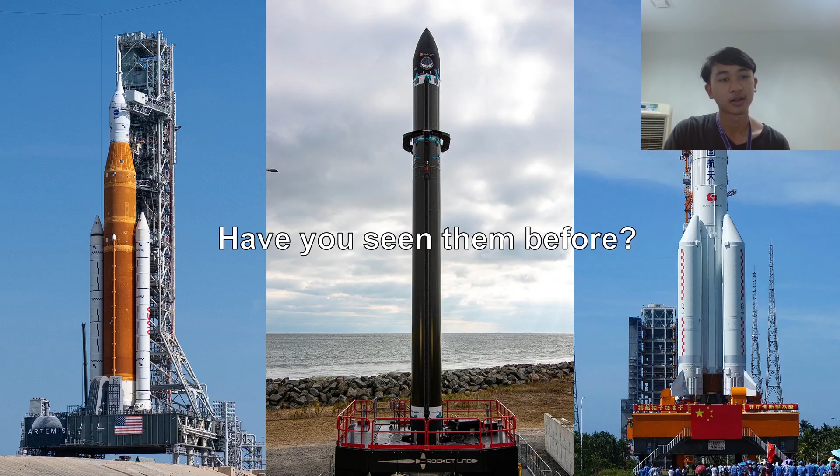Have you seen them before? Of course, these are rockets, and rocket or space technology and knowledge is a very valuable resource, though it is still very underdeveloped in Thailand. These are all examples of space products or space developments.

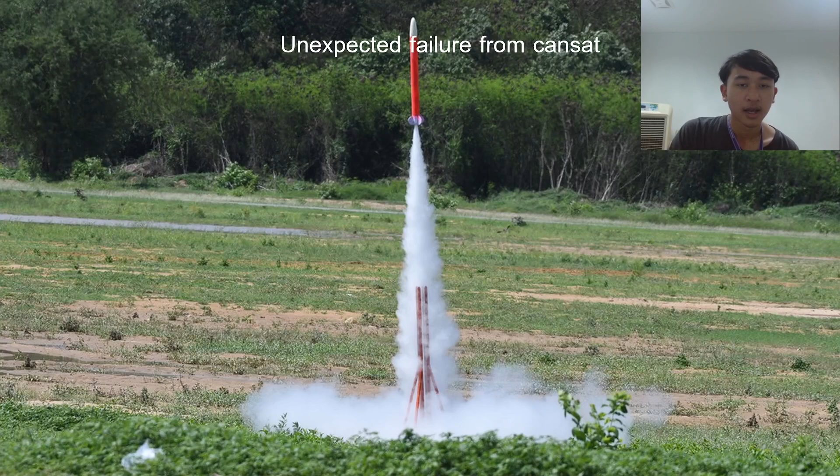We want to learn it and develop something, so we joined the CanSat 2022 competition in Thailand, and we found an unexpected failure from CanSat. That is, a rocket flew into the sea, making it unrecoverable. So we tried to find a new solution, which is dual deployment. Dual deployment doesn't really work because we can't control it. So we have to find another new solution, and we found this.

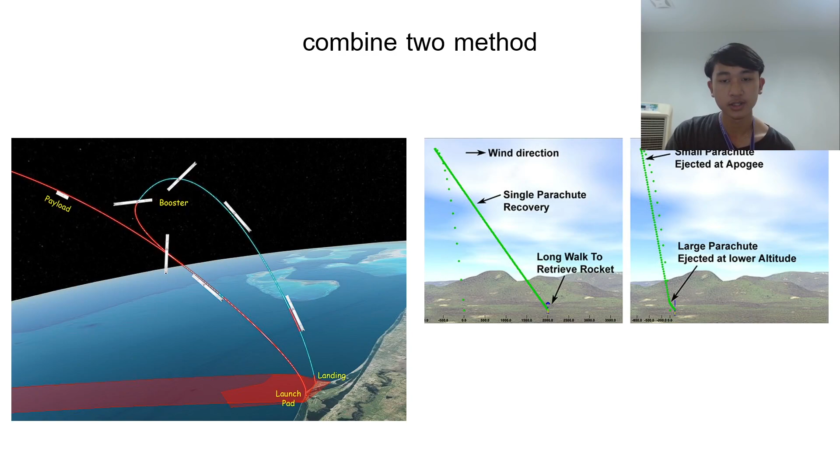SpaceX. SpaceX used a liquid-fueled rocket engine to do a boost back burn and then land their craft back to the landing complex. But we can't do that because we use a model rocket which is smaller and can only house a solid fuel rocket. So we try to replicate the method using a new invention: we combine two of their methods into our new method using a glide wing and then use a parachute right before touchdown to slow down our craft right at the base.

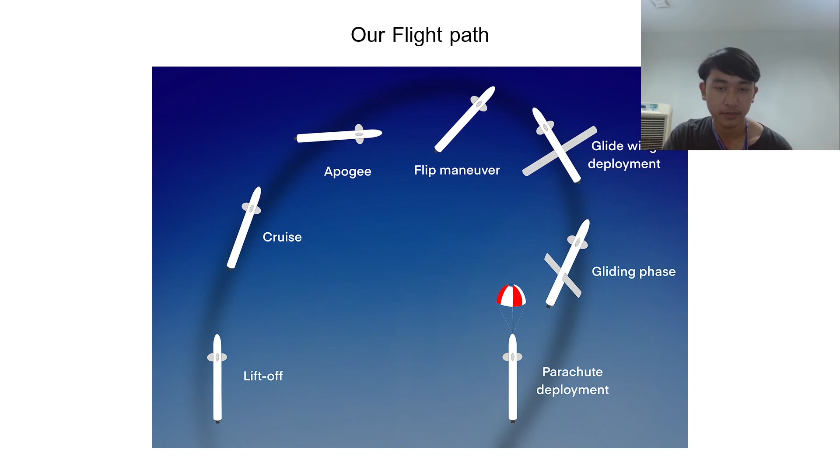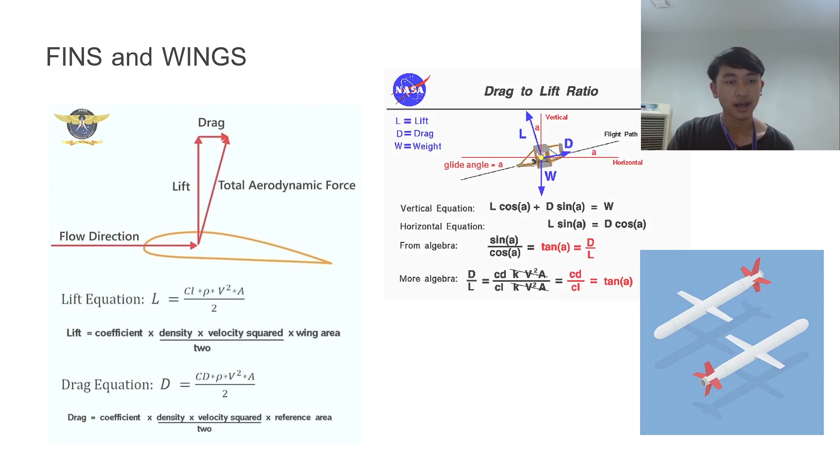Next, we will talk about our rocket and our building process. Our rocket is composed of three main parts, which are the flight computer, guided fins and rear wings, which will make most of the lift, and a parachute bay. Our wings and fins are designed according to aerodynamics, and then we design our flight path accordingly.

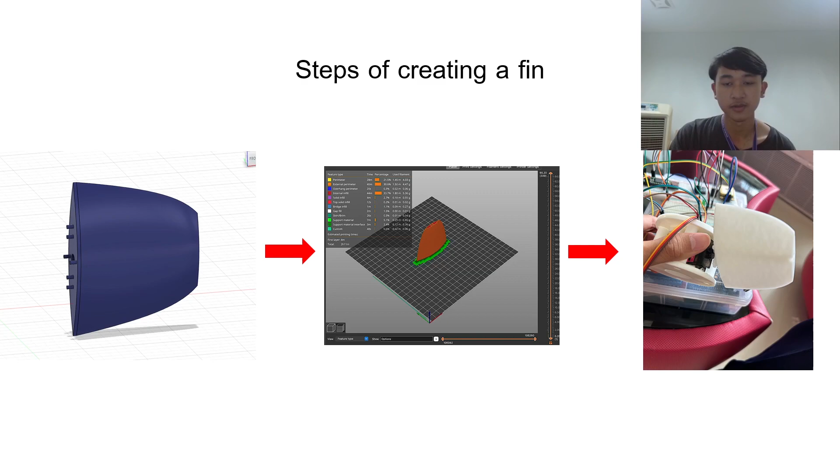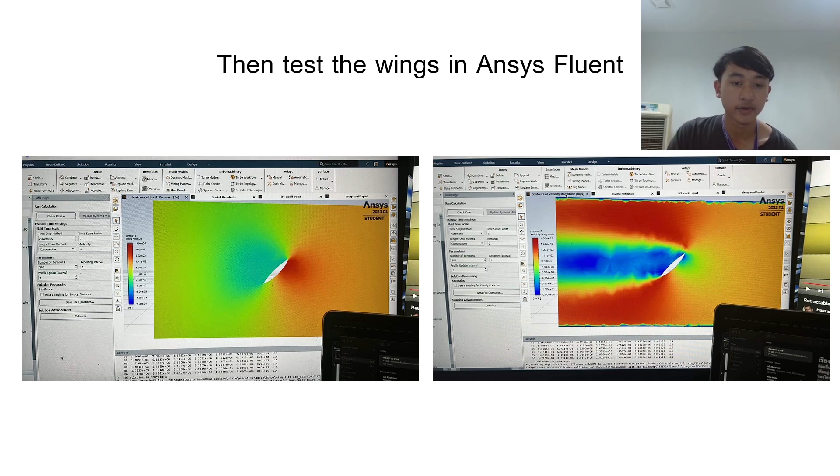And then we created it in Fusion 360, making it into a 3D model, and then sliced it in Prusa slicer and printed it using 3D manufacturing. On our left is our design drawing of the mechanism, and on our right is the 3D model prototype of our rocket. And we tested the wing in ANSYS Fluent to verify the characteristics of our fins and wings. This is our simulation data and our profile for the wings.

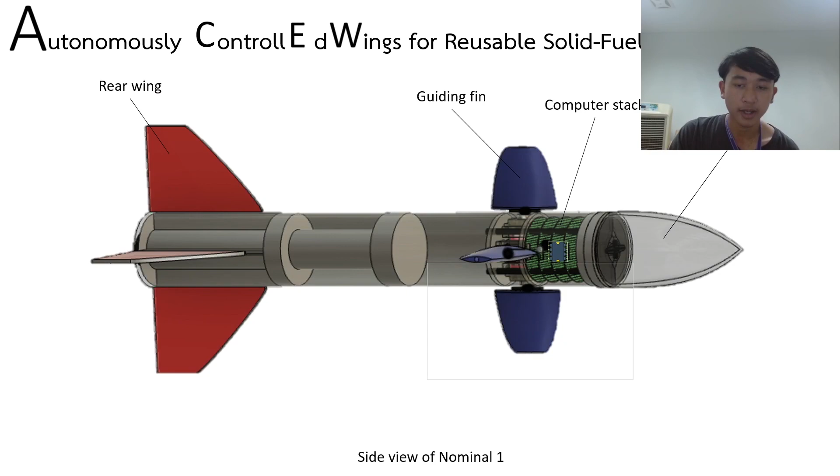Next, we'll hand the mic to Chupung Vibun to talk about the control system. Before we can control the rocket using the flight computer, we first have to know where our rocket is. But how do we know where we are? In order to obtain position, we use a GPS module tracked by satellite to calculate displacement from the launch pad, then calculate the flight path and feed data to the main control loop called the PID loop.

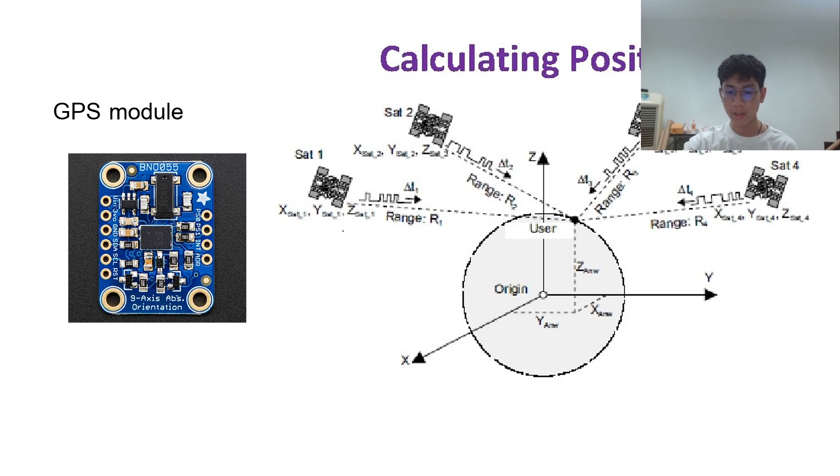But why are we using PID control? Because even though we know how the rocket should orient in order to glide along the appropriate flight path, we don't actually know how to command the steering fins accurately, and PID deals with that job very well. What PID does is set up an orientation set point, command the steering fins, and then measure the error from the set point and feed back to the control loop to reduce error. Due to that process, our rocket can orient approximately to the desired orientation from calculation.

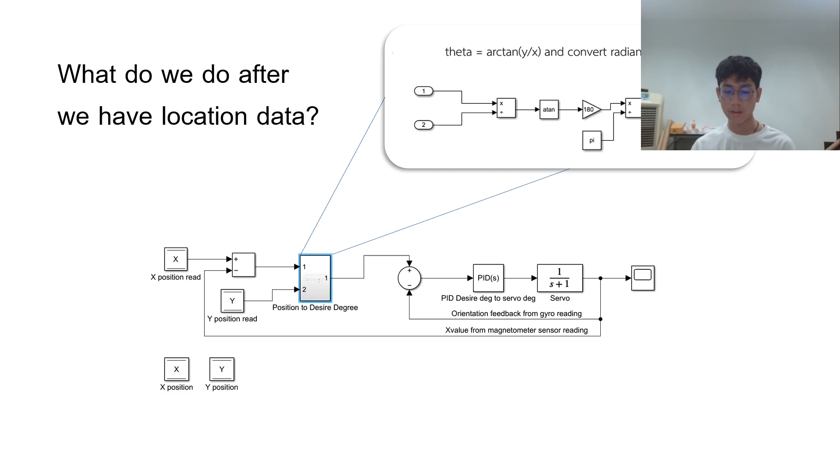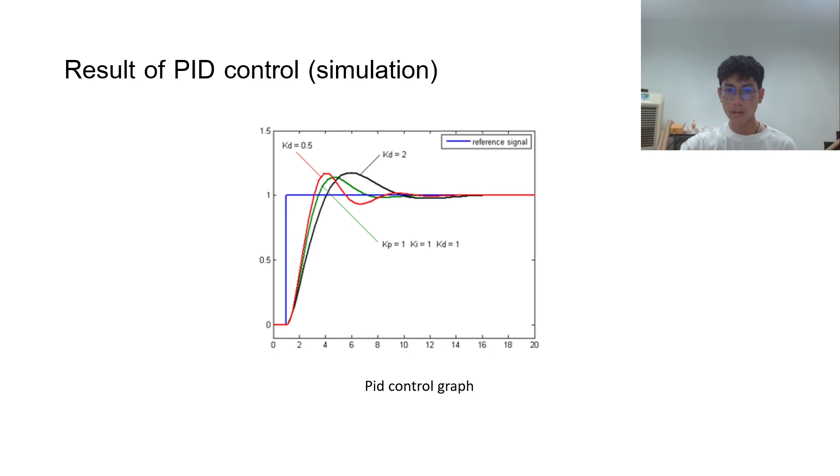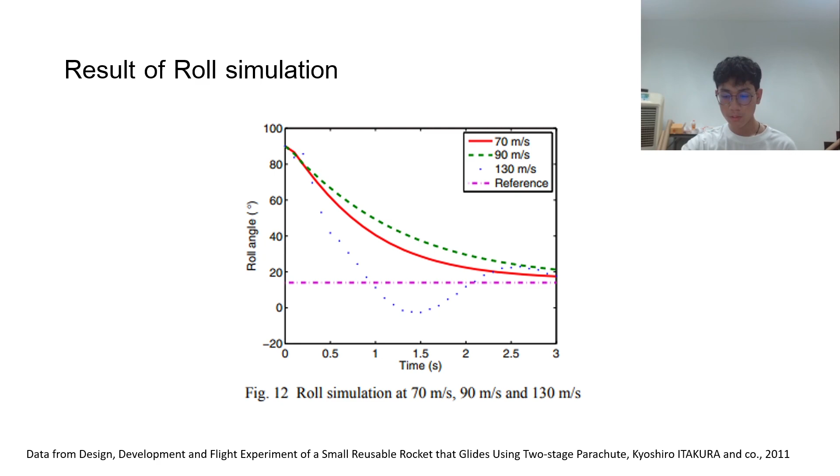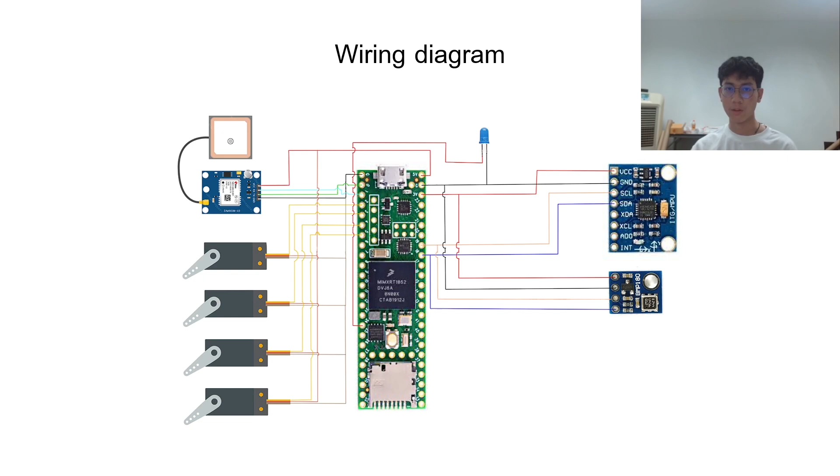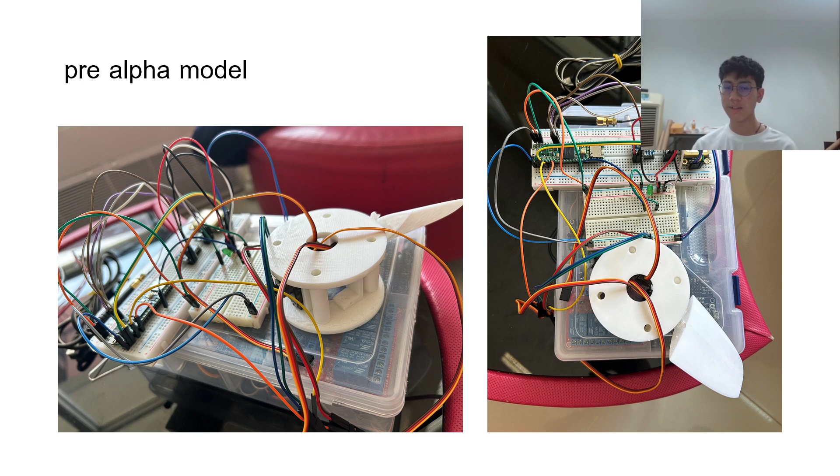That means our control system worked, but I have to say that we didn't simulate the displacement yet, and that's the end of the software part of the flight computer. But we also need the hardware, so we use the Teensy 4.1 microcontroller board and connect sensors to the board. And this is our wiring diagram. Here is a pre-alpha model where we connect jumper wires directly to a breadboard, but it looks kind of messy, so we improved it by using a perf board and soldering it.

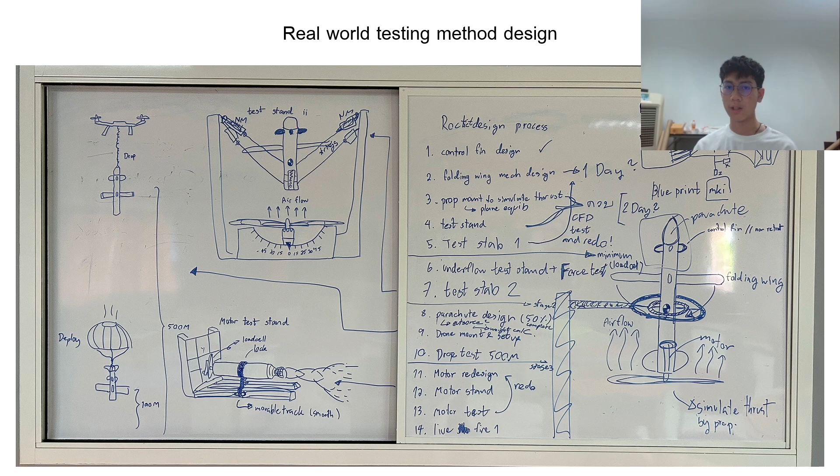And for our future plan, we intend to develop a real-world testing model and method design. And we built a test stand structure from aluminum profile. And that's all for our presentation today.